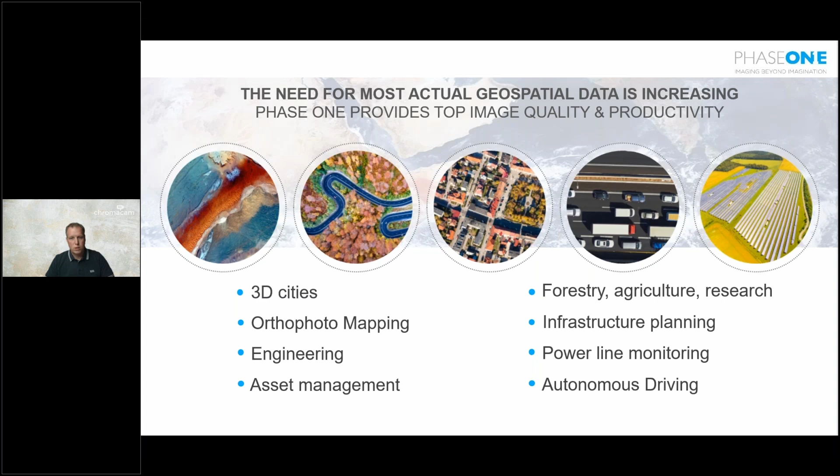So the need for most actual geospatial data is increasing a lot since many new applications and future technologies require the latest detailed geospatial information, such as 3D cities for creating smart city models, large coverages of orthophoto mapping, engineering asset management, for example in the renewable energy sector, where this is very important, monitoring of forests and agriculture areas, infrastructure planning like power line monitoring and pipeline monitoring, and of course the future demand of high accurate road and city data to enable safe and autonomous driving. To all these applications, Phase One provides high-class photogrammetric cameras with top image quality and productivity.

First of all, I would like to introduce you a bit to our company Phase One. Phase One was founded in 1993 in Copenhagen, Denmark. It is a trusted brand with more than 100,000 satisfied customers around the globe. We are the market leader, I can say, in medium format imaging with a worldwide distribution network in more than 50 countries across all 7 continents, and a customer-orientated and innovative Phase One team of 320 employees across 11 countries, providing 24/7 global customer support.

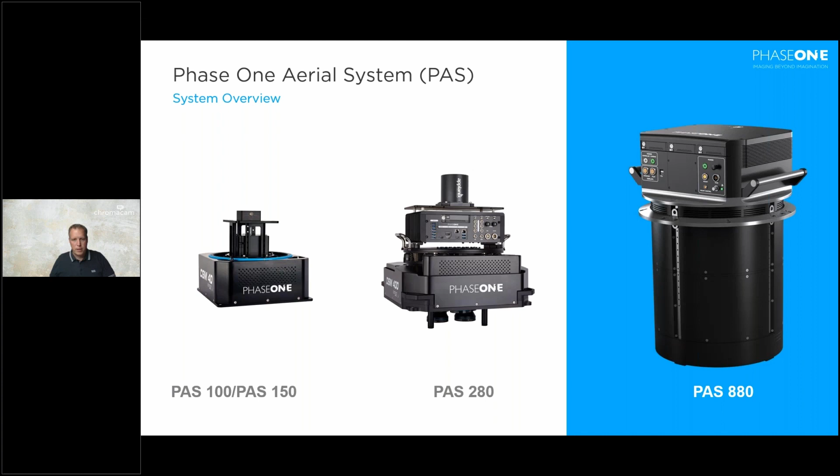The very interesting thing about Phase One is that the company is a very innovative company and tries to build the best sensors and the best systems for the customer, especially looking into quality of the sensors and the system size and weight. So our sensors are very light, as you can see here. The PAS100 and PAS150 weigh only about 19 kilograms as a full complete system, whereas the PAS280 is about 33 kilograms, which is a third of any other competitive large format camera. In addition to this, you just need a low power consumption of maximum 180 watts in the plane, which means that with the small systems, the PAS100 and 150, you can even fly this camera in ultralight or small UAVs as a fully integrated aerial system.

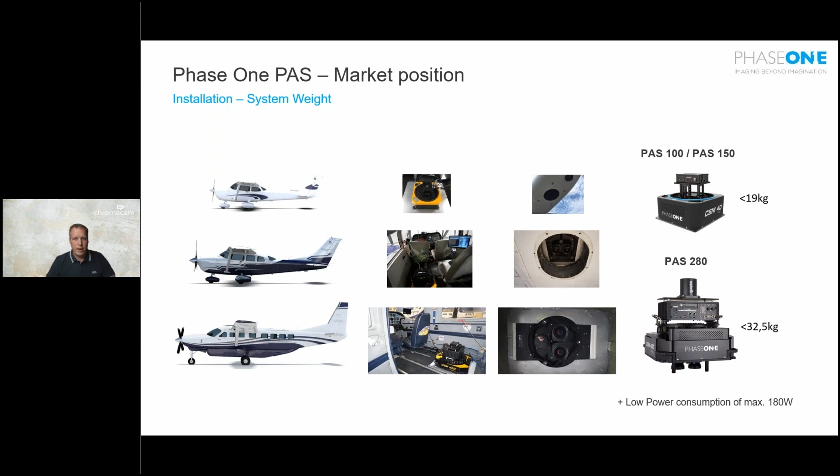Some key specifications of our PAS280: it comprises actually of 2 150 megapixel cameras, which are mounted on a fixed system frame with sensors shifted over the lenses to achieve a single focal plane and to produce a single large format image as an end result with a size of 20,000 pixels across track and 14,000 pixels along track.

The sensors are based on our unique backside illuminated CMOS technology, which captures images in a very high dynamic range and provides good image quality even in low light flight conditions, like you have in autumn or winter, which means that in the end you can fly more during the day or during the whole year than with any other sensor available in the market. This is a big advantage of the Phase One sensors.

The camera itself takes images with an impressive high speed of 2 frames per second, and this enables you even to fly 97% overlap for a 10 centimeter GSD project at 150 knots, or you can fly at a very high speed with 390 knots maximum speed for a 10 centimeter project with a motion blur of under 1 pixel.

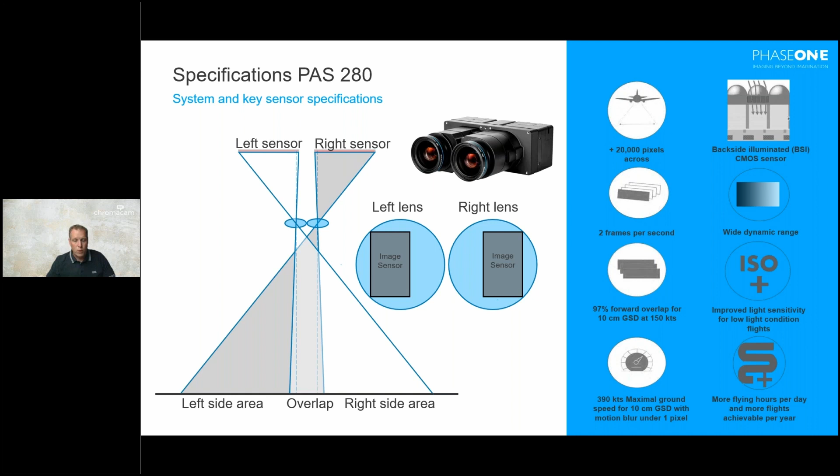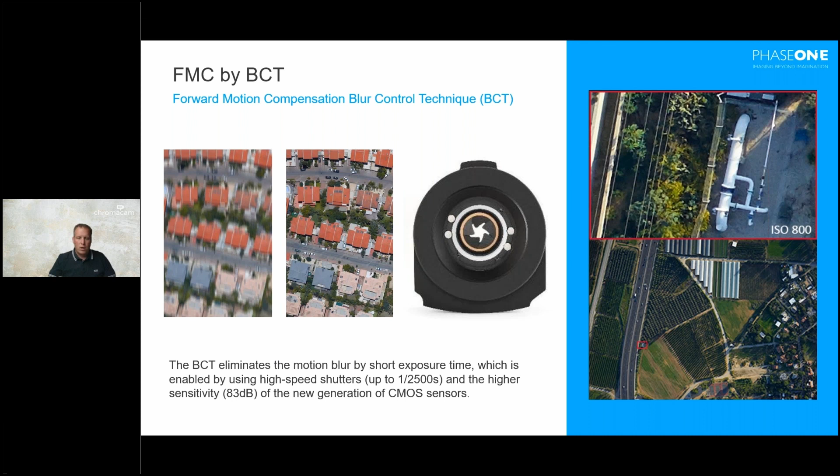Especially our forward motion compensation blur control technique, it's a very unique technology which eliminates the motion blur by short exposure times, enabled by our high-speed shutters with an exposure time of up to 1/2,500 seconds, and our new generation of CMOS sensors with the incredible high sensitivity of 83 decibel, which means you can retrieve all information in shadow areas like here at the pumping station on the right side of the slide.

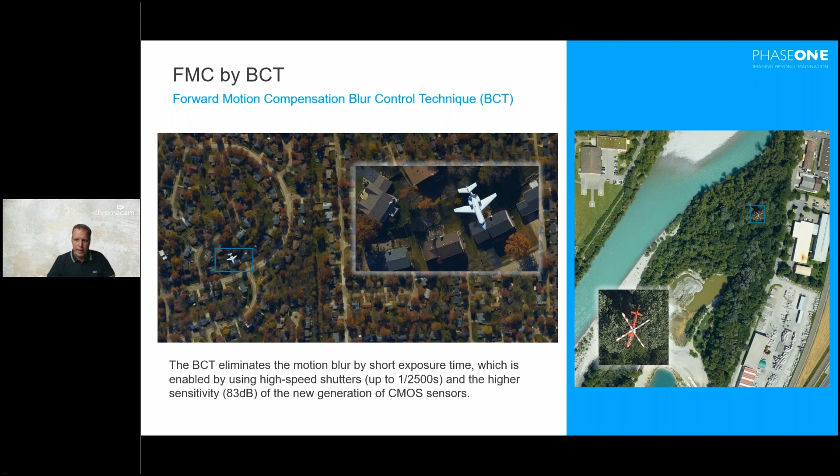Or if we go to the next slide, there's even no blurring occurring in fast-moving objects like here in this airplane in flight, so you don't see any blur on this high-speed flying aircraft. And I think even more incredible is that you don't see any blur effects on the helicopter rotor while it was flying here over the trees on the right-hand side of the image.

Another addition to our systems, so you can operate both systems either in RGB mode only, or you extend your systems, the PAS100, 150 and the PAS280, with a near infrared camera. So you can have a 4-band sensor as a complete system, which is extremely useful to do environmental mapping or forestry application work, because you can easily detect any type of vegetation in the image and you can extract the NDVI from the collected data.

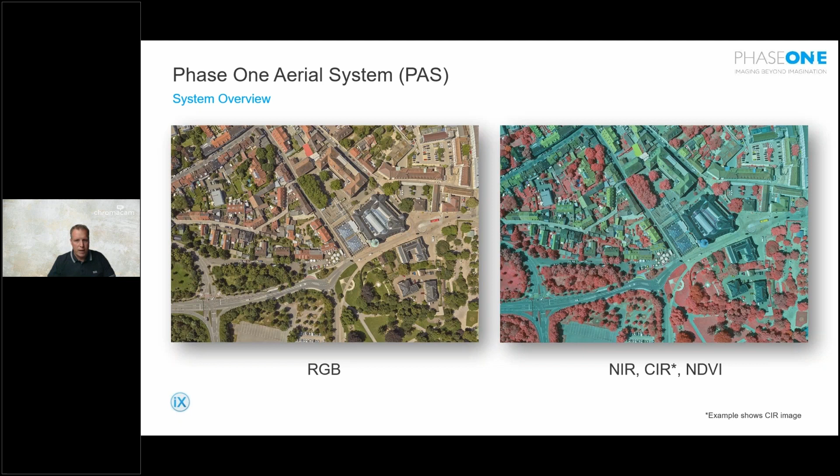So just as an overview of our PAS280, it really sets the new standard for large format cameras and delivers the highest endurance efficiency compared to any other systems. We are, I have to say, the most price competitive system provider in the world. With a sensor you have the lowest operational costs, plus you have the lowest flying costs since it is very lightweight and compact, and you can just fly more as you have less weight in the plane.

It comprises the latest sensor technology, and you can fly up to 1.5 centimeter GSD and upwards. The good thing is, as presented also before between our different types of PAS systems, all our systems are easily upgradable from the lowest version to the highest version. And that's why I would like to introduce you to our new PAS880 system, which is a large format nadir and oblique aerial system. And I would like to introduce you to that system with this nice video.

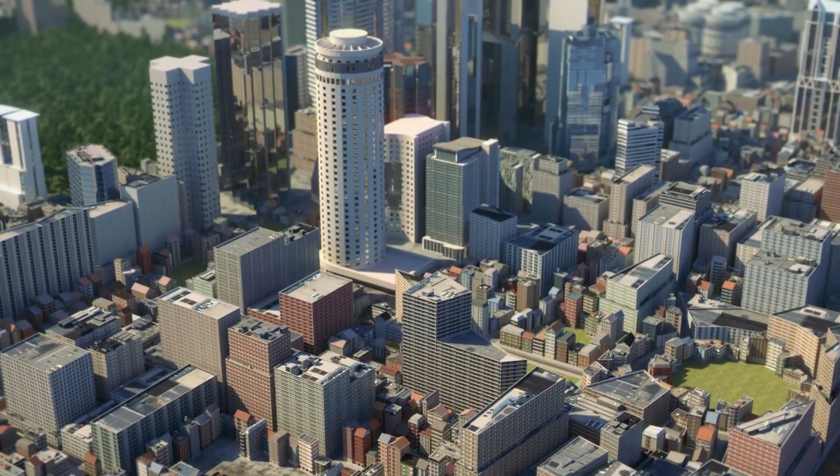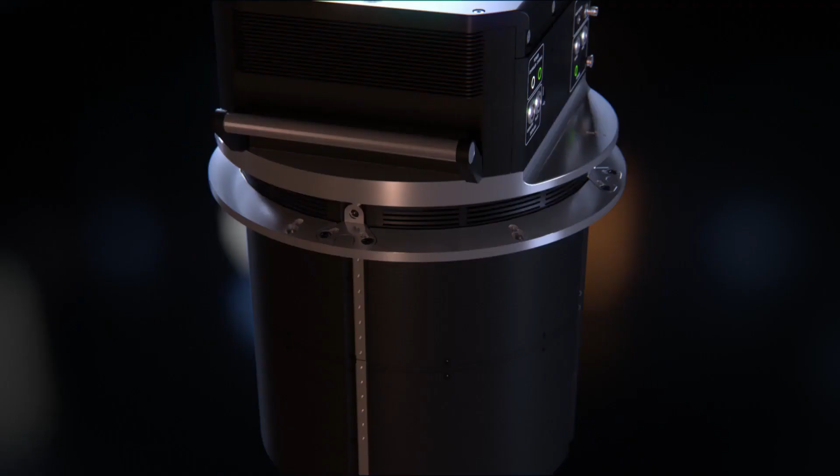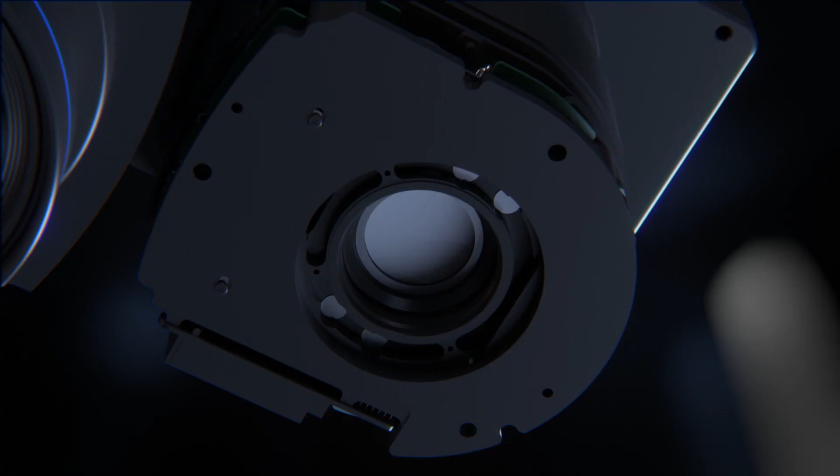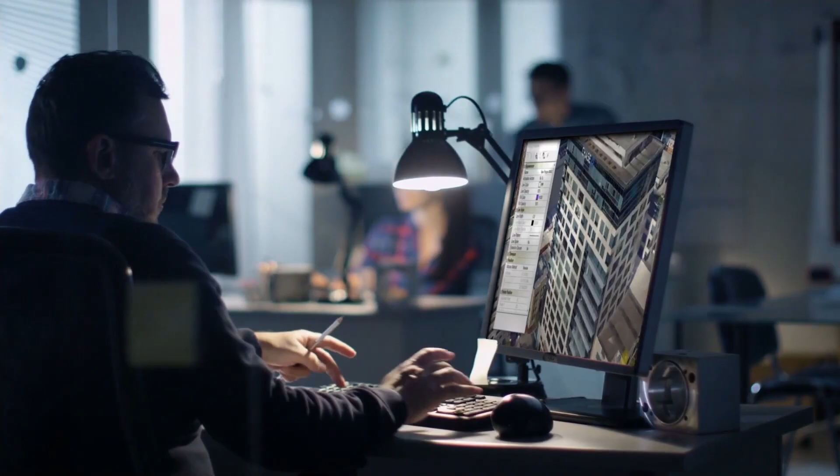Every day, the world is evolving. As new cities and communities are built, there's a need for advanced planning with accurate geospatial data. To answer this growing demand, Phase One introduces PAS 880 Oblique and Nadir system, the new 280 megapixel large format oblique system for high-resolution geospatial missions and 3D models. The solution's flexibility enables dual configuration for collecting 3D oblique and 2D imaging. The PAS 880 is based on the established technology of 150 megapixel and 280 megapixel cameras, which comprises the backside illuminated CMOS sensor for perfect image quality. The lens's integrated RS shutter, with its long-proven reliability and high speed, delivers record-breaking actuation capacity. The unbeatable performance of the capture rate contributes to the highest accuracy and quality for effective 3D modeling projects. Ultra-fast writing capability and large storage capacity is provided by the control unit. Thanks to its sleek design and adjustable plate, the PAS 880 is installed in minutes and fits most aircraft. With the new generation Phase One software, flight planning, data collection, and image processing are easy and efficient. Phase One designed an open system, allowing freedom to work with any leading post-processing software. The PAS 880 is developed with uncompromised quality and the best ROI for 3D and 2D imaging missions. Book your demo today.

So this amazing and really truly unique combined large format and oblique sensor follows the motto, fly once and get it all. And just to show you some examples on what you can do with this amazing camera. So with the PAS 880, you can do a combined countrywide nadir and oblique mapping at the same GSD resolution.

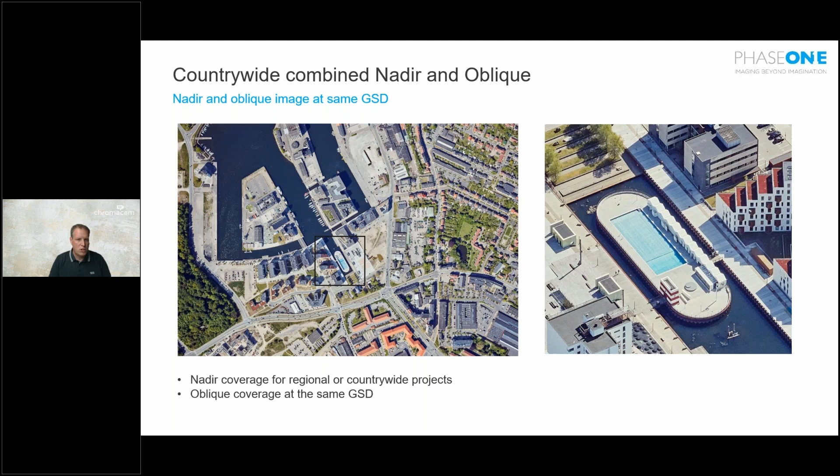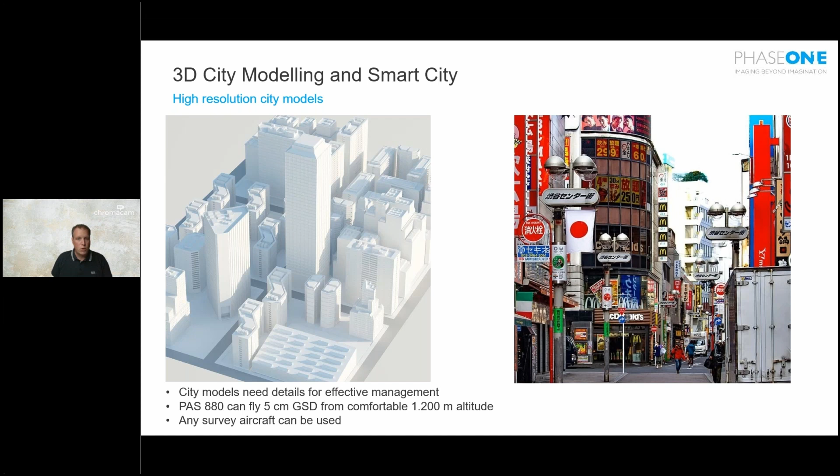Especially for 3D city models, you can create smart city applications in high resolution of up to 2.5 centimeter even. And with a 90 millimeter lens, it enables you to fly, for instance, a 5 centimeter GSD from a comfortable 1,200 meters altitude. The good thing is also any survey aircraft can be used to do the 3D city modeling collections, plus your combined large format collections over your area.

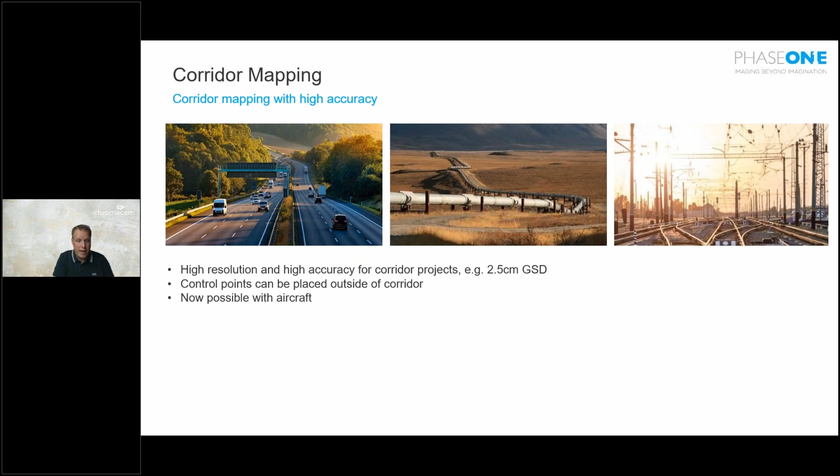The sensor can also be used for corridor mapping with high accuracy and high resolution. Having the oblique sensors on board, ground control points can be placed even outside the corridor. Usually corridor mapping activities are mostly done by helicopters, but with the PAS 880 it is now possible to fulfill these tasks with an airplane, and in much less time, since the airplane can fly much faster than a helicopter.

Emergency mapping is a big new thing coming up and becomes more and more necessary due to the increase of natural disasters like hurricanes, flooding, or forest fires, which require a very fast response and aerial images for damage assessment. And due to the high speed of the camera, it's easy to go in the air, collect the whole affected area, produce the data in a very short time frame and deliver it back to the emergency responders.

Another thing is environmental monitoring. We do have customers who do bird or seal counting from a plane, which is very important because you do not disturb the environment on the ground. You're not touching the environment there, so the birds can continue to breed.

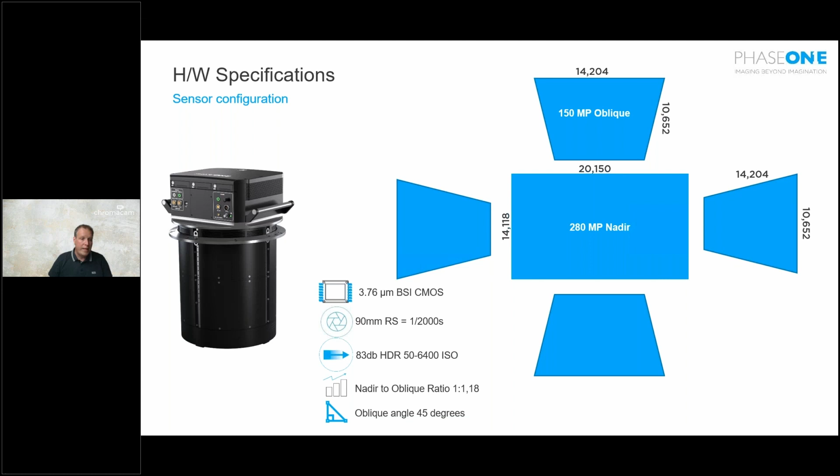Here's again some key facts of our PAS 880. As you can see, we have a nadir camera. It's the same nadir camera as the PAS 280, so it has 20,000 pixels across and 14,000 pixels along sensor in the center, and we have 4 oblique cameras comprising of 150 megapixel cameras. The oblique angle is 45 degrees towards the nadir channel.

The system collects with 2 frames per second, supporting more than 80% forward overlap at a very high speed. It comes with 12 terabyte storage, offering more than 13,000 images storage per camera, and it has an integrated Applanix GNSS IMU solution. In total, it's really a lightweight system and compact design, which allows easy, fast installation. Compared to any other system I have seen in my experience, this is really the fastest way of installing a camera you can get with a PAS 880.

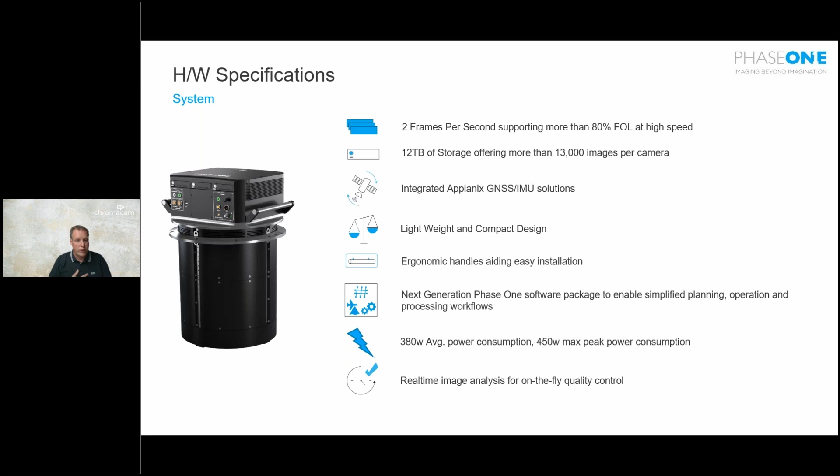Plus, it comes with our next generation Phase One software package, which enables simplified planning, operation, and processing workflows. Same for the power consumption. It has a maximum of 450 watts peak power consumption. Usually, it just needs 380 watts. In the plane, it comes with a monitor, so you can do real-time image analysis for on-the-fly quality control.

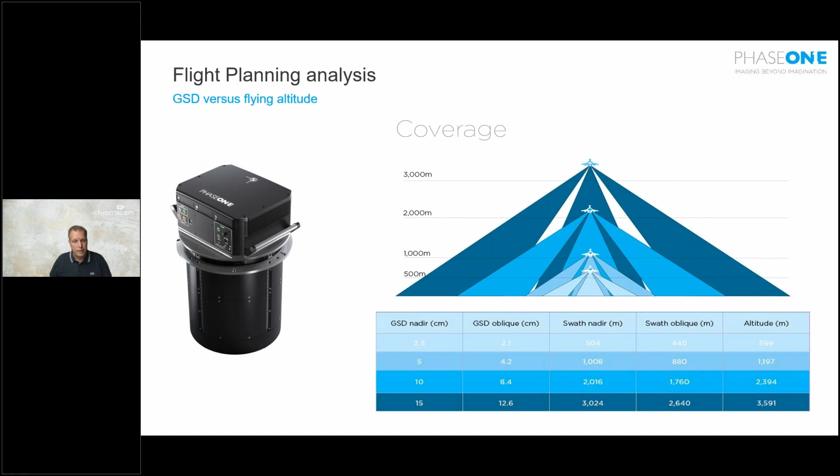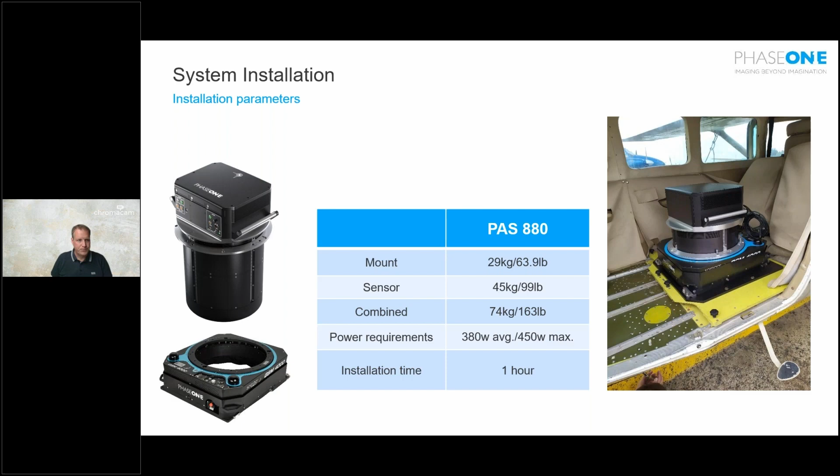Coming now to our unified acquisition and processing workflow. This is also a very nice thing, since Phase One is focusing on the sensor technology and all the required software around making a planning of the flight with our IX Plan software, or flight management software, IX Flight and IX Capture in the plane, where you do the quality control in the plane, and the post-processing software later on in IX Capture and Capture One.